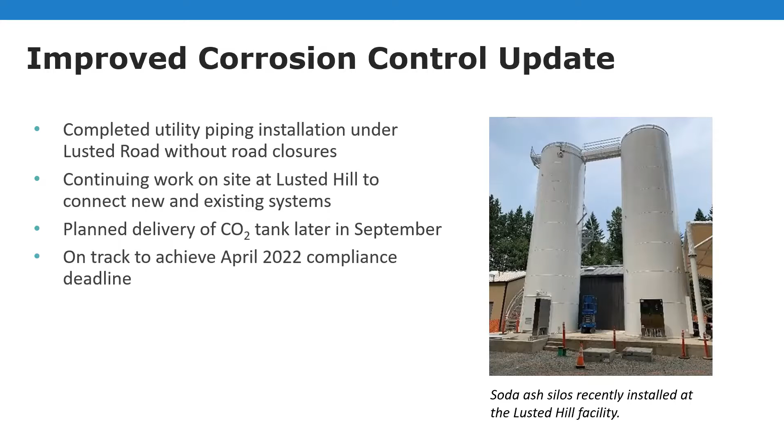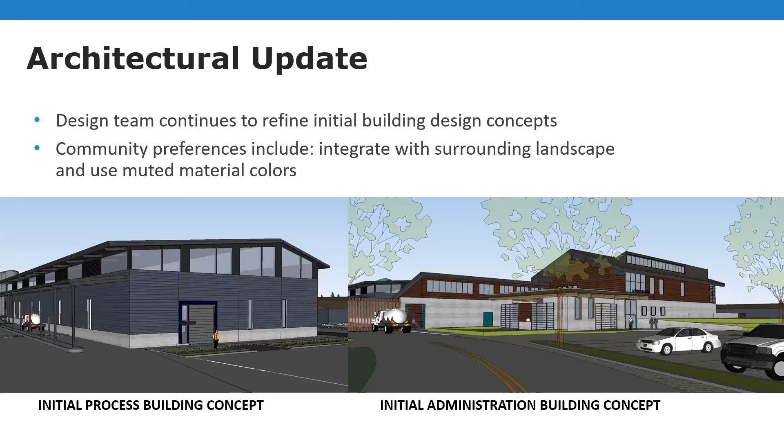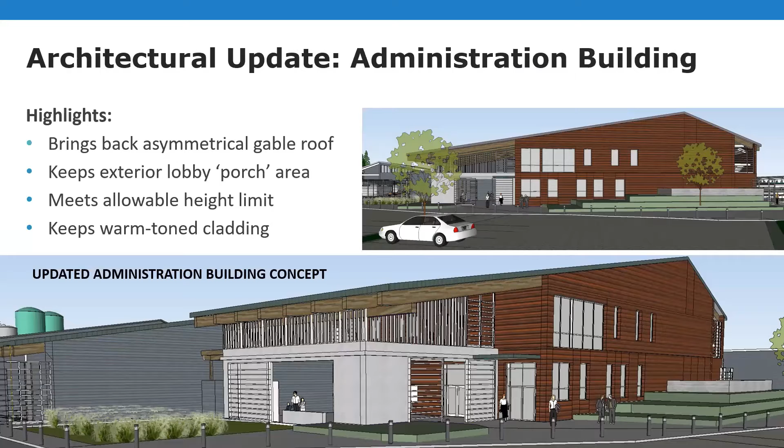If you go to the next slide, you'll see how that has changed. The highlights are that we brought back the asymmetry on the gable roof, so instead of being centered, it's offset. We also maintained the exterior lobby, or what we call the porch area. We ensured that it's still meeting that allowable height limit, and we kept the warm tone cladding, which helps with integrating into the surroundings and blending in better.

Here's a view of our process buildings. Again, you'll see that asymmetrical gable roof that harkens back to the rolling hills design that was popular. The building forms really match the functionality of what's occurring inside the building - simple shapes, meeting the allowable height limit, and being able to perform the needed work inside.

Now we're looking at some views. Just want to pause real quick here - Patricia has a question: what is the gray material on the front of the admin building?

Right now these 3D renderings are showing a conceptual view. These materials have not been specified yet, but that's generally called cladding - we have not done the material selection yet. That'll occur later in design, but this at least gives you a feel conceptually for what we're looking for. It's a great question. Those details will be fleshed out in later design phases.

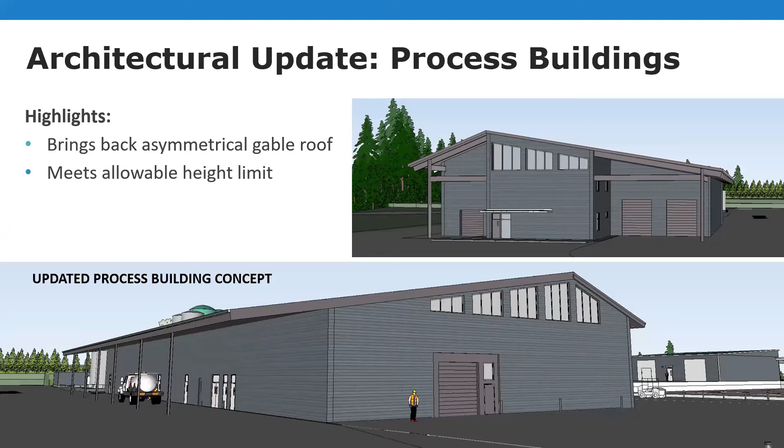On the next slide, here we have two views from adjacent properties. The top one is looking at the site looking east, and at the bottom, it's looking west from adjacent properties. Again, you can see the lower profiles and trying to blend in with the existing and surrounding landforms and landscapes.

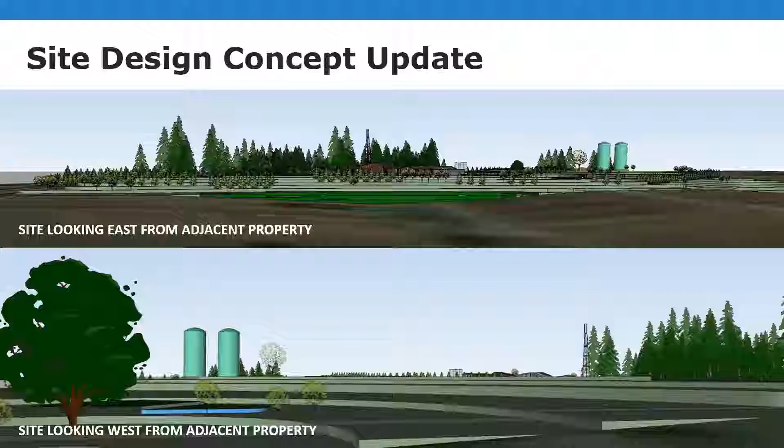I think if you go to the next slide - so now we have a model. We'll do a flyover that I'll walk you through. Thanks, Aubrey, for kicking it off. Right now we have a bird's eye view. We're looking north, and you'll see that the design maintains having the structures on the western portion of the site.

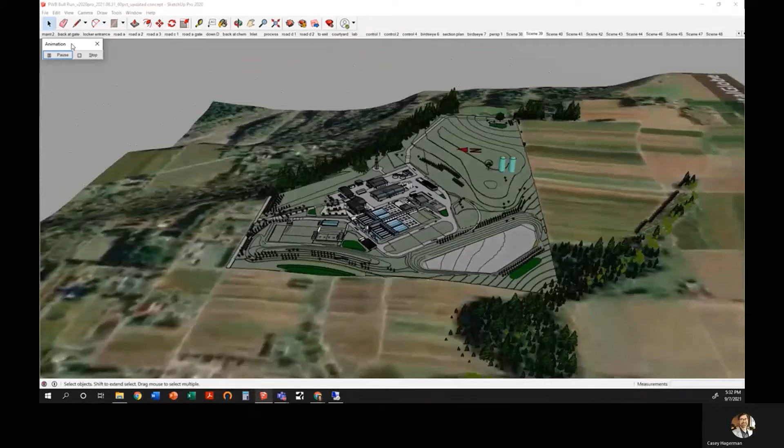We went ahead and changed the roof forms to better fit with the rolling hills concept and meet community and staff feedback. On the western side of the site, you'll see some berming and landscape. That landscape will continue to mature as time passes, and that'll help to screen views.

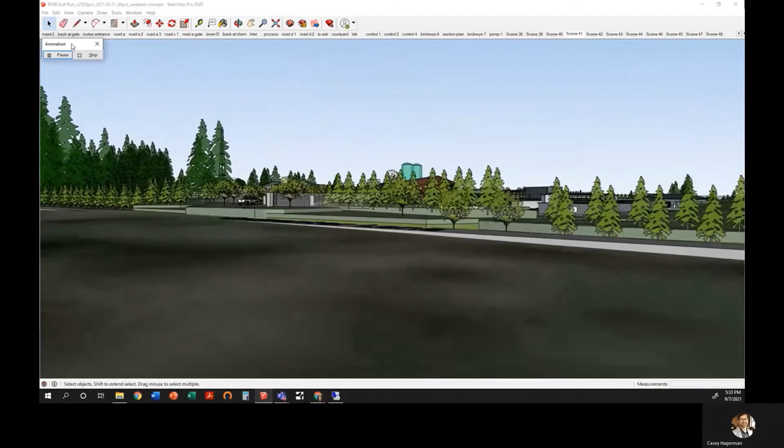As we travel on Carpenter Lane, we are now approaching the main entry gate. That gate has been set back from the property line. That was something we had heard through the Good Neighbor conversations.

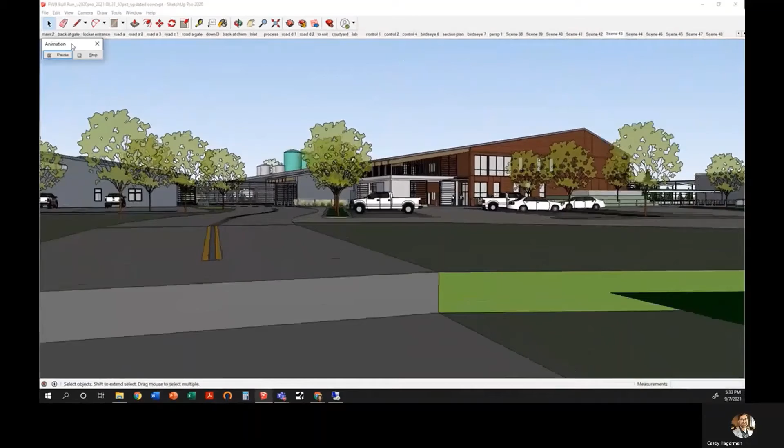As we drive into the facility on the left, you'll see the maintenance building with the asymmetrical roof line, and on the right you'll see the admin building. Again, we have that asymmetrical roof line to go with the rolling hills concept. You'll see the landscape and the stormwater catchments are very similar to earlier renderings y'all have seen, and you see the warm tone cladding for the admin building.

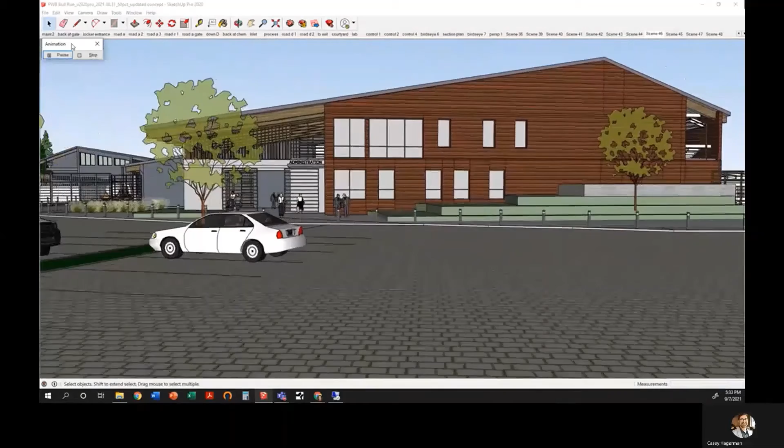As we continue to approach from the parking lot, you'll see the front porch area. It's open, unconditioned, and we have the main entry into the building there on the right-hand side as well.

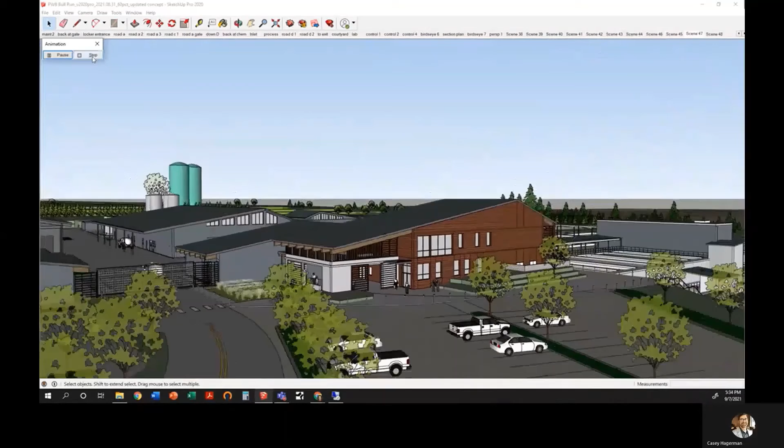These 3D renderings make the facilities feel a little bit more complete in their design than they truly are. So we will continue to look at how we can refine these building forms and the material selection that was asked about earlier. That'll come in later design phases, and that'll be specified.

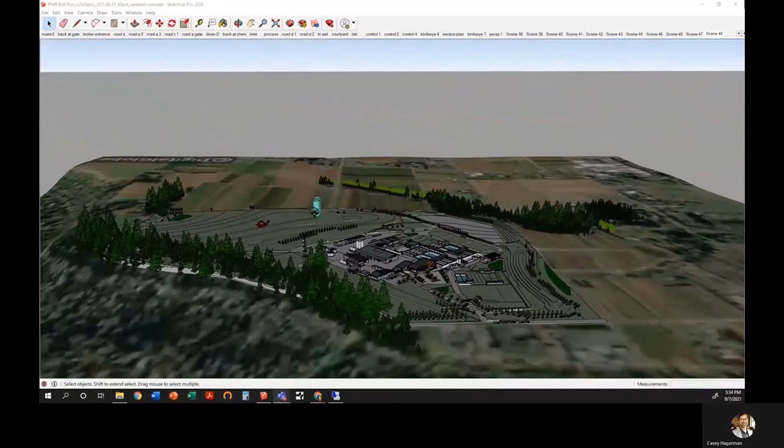Here we are back to the bird's eye view, pulling away from the facility. Again, you can see that concentration on the western side of the site. And Aubrey, that's all I have for y'all.

All right, so that was a great presentation. Thanks, Lyda, for giving us that update.

Does anybody have any questions or feedback on what we've talked about today? I know it was a pretty short presentation, but we haven't had a whole lot that changed over the last time that we met in June. So happy to answer any questions.

And if no one has questions, we're happy to end the meeting early.

Okay, Patricia says, please explain how one can access the site. Lyda, do you want to take that one?

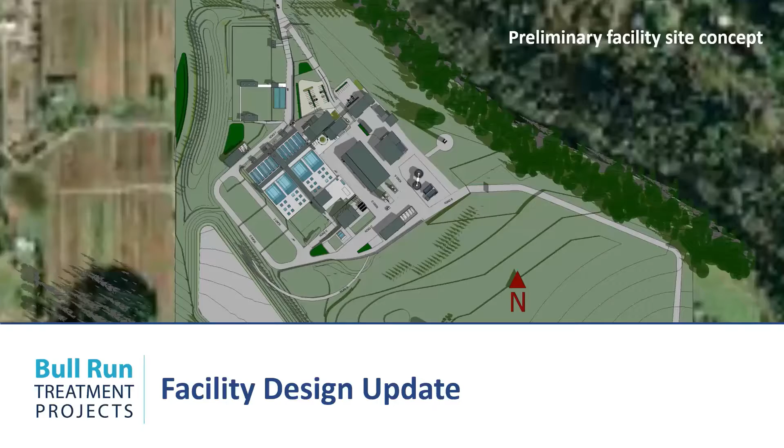So what we are looking at right now is having 2 access points. We are looking at options for the northern access, and we are working with Multnomah County on which access to proceed with. Let's see, maybe you can go to a slide that's a little more zoomed out. Okay, so we have 2 options that we are considering, but we have to work out with the county which one will be best suited for us.

We are also looking at emergency access to the south of the site. Outside of the main interior process area of the facility, there is a road that travels to the east and then along the property line. That would be our southern access, and we're looking at that for emergencies only.

Dean and Pat asked about the road on the east side of the property. I think they're referring to the south access we just discussed, Lyda. We're still in design and haven't made any decisions yet. We're looking at that as an option, but if there's something more specific you wanted to know, let us know.

Sam asks, what modifications will be necessary for Carpenter Lane? I think that's along the same line, something we're still working out the details of. Lyda, or Michelle, do you have any thoughts about that yet?

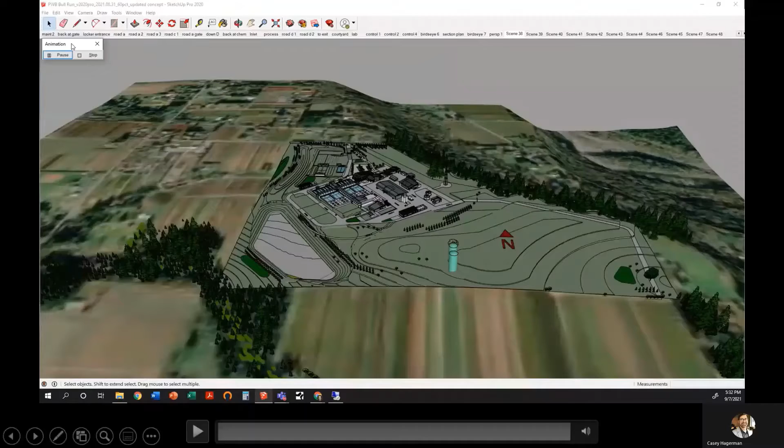Yeah, I can jump in, sorry, I'm trying to restart my video. You're right, we haven't identified any modifications for Carpenter Lane yet. It's dependent on our continued evaluation of access to the site. As we get through those evaluations and have more information to share, we'll bring that back to the group.

We should know more about access by the end of the year, so for the next meeting in January, that's the plan. Anything else? You can raise your hand, or your virtual hand, or type in the chat if you have any questions or thoughts.

Okay, I don't see the tower. Sure, I can help with that. Actually it is placed there, it's pretty well blended in. On the slide we're looking at right now, the site looking north from Bluff Road, you'll see the Pleasant Home tanks sticking up. Then you see some trees and a tiny black triangle pointing up. That is the tower. We've looked at placing it close to that tree stand so it will blend in better, but the tower is there.

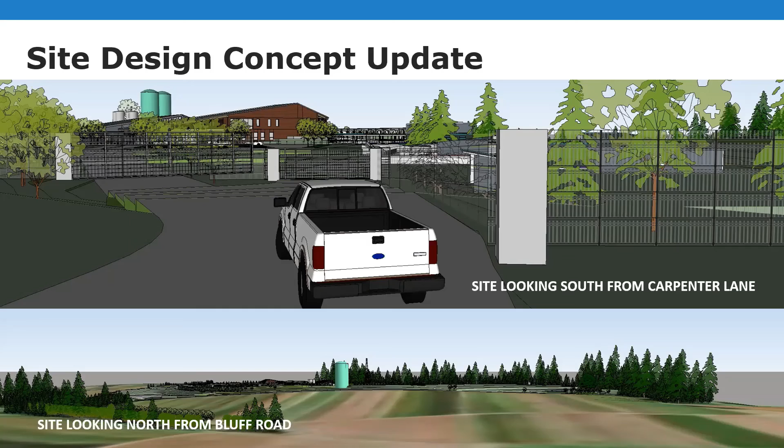Anything else? Aubrey put the past meeting list in the chat. So if you click on each one of those meetings, it has the videos, the summaries, and the presentation materials. Anybody else?

Well then, let's go to the next slide. We are planning another information meeting in January when we anticipate having more information about the pipeline progress and the access that seems like most people here are interested in. We've heard from a number of you that you'd like to meet in person. We'll continue to follow city guidelines, but we will schedule an in-person meeting if we can in January.